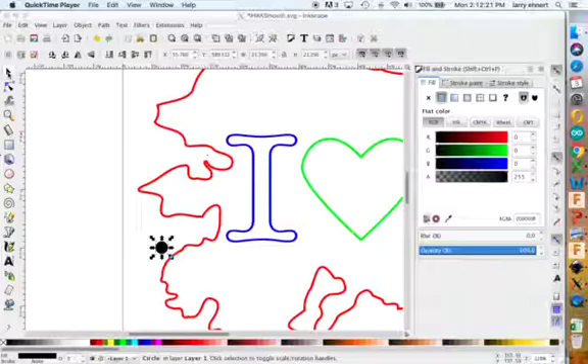So you spend a lot of time fixing your file. I've got I Heart Alaska without as many nodes as going into the laser cutter or vinyl cutter. So these have been enlarged out. I made a 6mm circle that I can drag around, see will it fit in here. It looks like it should. Just barely, but I think that'll be good enough. We'll know a little bit later.

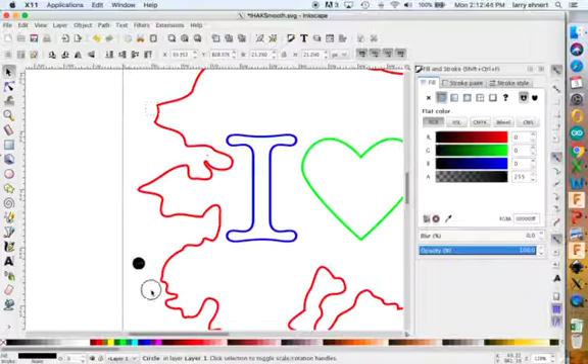Down here, it goes in. I can get some detail. Now, I'm going to lose this detail in here. I can't get into there. It's okay. I'll do the best we can. We'll come in here and we'll just recognize that that's not actually going to work, but we'll come close. So I've got my smoothed shape. I have this actually the size that I'm going to cut it. So I've made this be around 200 by 200 millimeters.

And if you import this into Fusion 360, it doesn't import exactly the right size. So we're going to make a place for it to go that is 200 by 200 and then just make sure that we're close. If you need something imported that's an exact size, you have to do a little math and figure out what the actual enlargement ratio is. And I'm still working to try to figure out what happens when you go from an SVG file into it. It's close, but it isn't perfect.

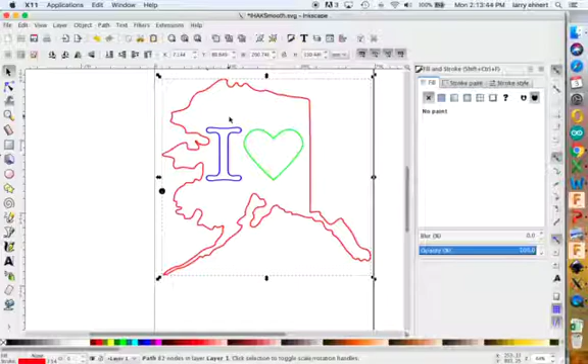You can look on the path editor and you can see the number of nodes. I've greatly reduced them doing the simplify operation, Control L, got it down, and then it took a little while going around, smoothing things out, making it look real nice. So I'm pretty happy with how this is going to be. It's what I want, and it won't be too many. If you have too many nodes, it's going to crash your Fusion 360 program. Just had a teacher come and tell me they tried to do something today and it didn't work.

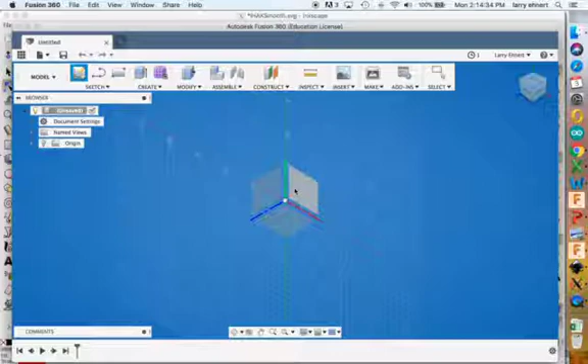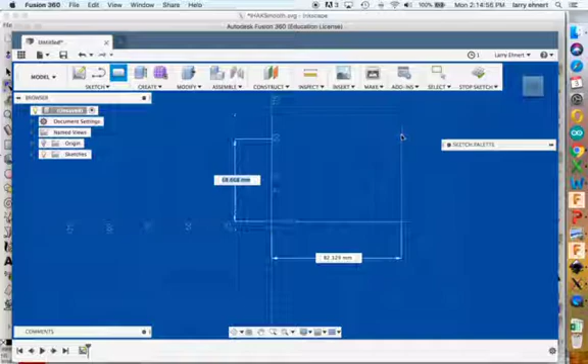So you've opened Fusion 360 and we have to create the shape in here. So we're going to make a new sketch, and again you have three places to choose. If you choose this XY plane, you'll have a lot fewer problems as far as setting up the router origin for the work coordinate system. So select this plane, green and red, and we're going to make a simple rectangle. Again, we're going to make the rectangle the size that I want to work with here. So 200 by 200 millimeters.

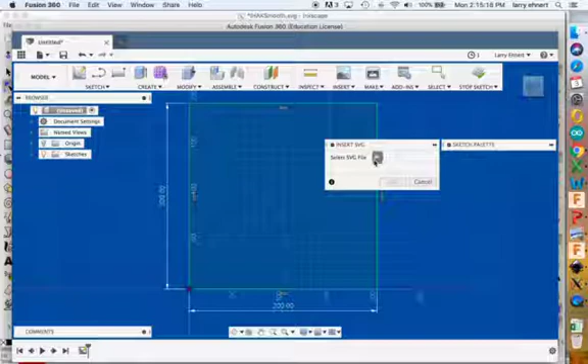If you need something bigger, you can use it. This is a good size for starting things out right now. And I will know that my imported shape will fit in there. I'll get a good feel for how big it is. I made the SVG. I have to insert the SVG. Finding the file. This is the one I made for the router, and it comes in at the 0, 0 axis, so I've got to move it around and drag it up, so it's not quite right where I want it, but it's pretty easy to move it.

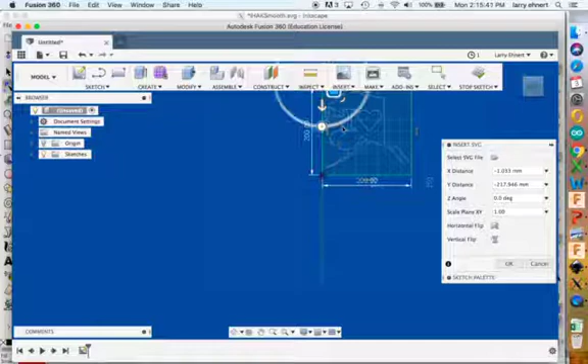So you just grab this little handle and bring it up, and if you want to resize it, there's a handle here to resize it, bigger, smaller, but I want it to be fitting the 200 by 200 square, and it looks pretty good right there. It doesn't matter where it is because the square is just for sizing reference. So I've inserted it and I'm done. That's all I have to do on the sketching.

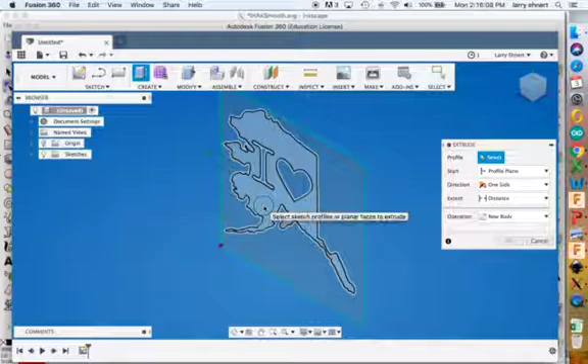I'm going to show you in the isometric what happens. I'm just going to extrude this 5 millimeters, and there's my part. That's what the wooden piece is going to look like if I want to cut out the eye and the heart. I'm not going to do the eye and the heart today, but they're there if I want to do it. So this is it. I'm done in the modeling environment.

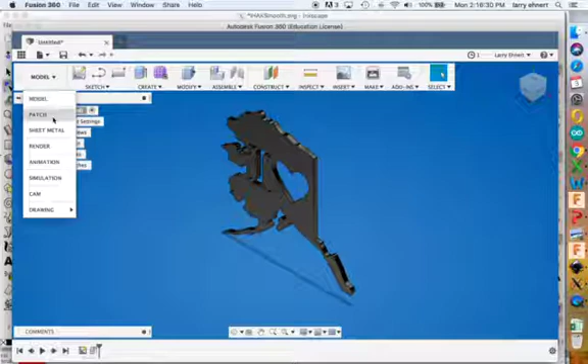Come over here and there's these other environments to work with. CAM creates the toolpaths, so it's for designing something to be built with a CNC machine. Computer aided manufacturing. So here's my CAM environment, with different choices along the menu ribbon.

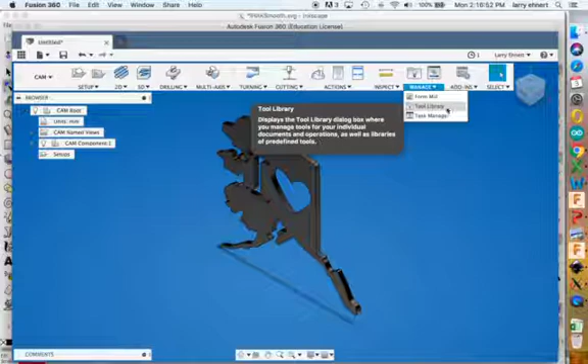First thing that you have to do one time, and that's under Manage, the Tool Library. You don't have the library, you don't have the tools that we own here at the SAS Fab Lab. They're in here. Put them in the local library, my SAS tooling. I make a copy of this. I have it on a flash drive. I've also uploaded it on the Google Drive for this course.

But right-click under Local and import the tool library. So get the flash drive, get it from the Google Drive. It's a compressed file, import that library, and you'll have all the tools and the right numbers for what we're using here. That will get updated on occasion. When I break a tool, I have to put a new one in, but this will do what we need to do for the router especially.

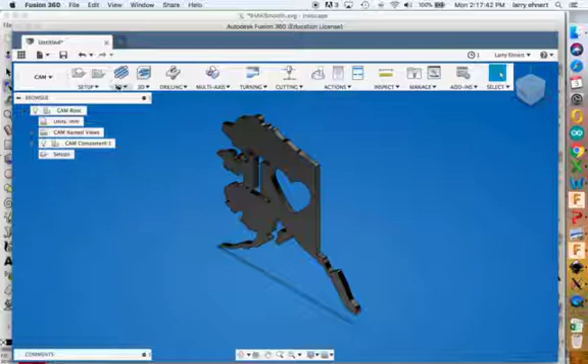We're going to be using tool number 92 here. So my tools are there. Hopefully you can put yours in. And there's two things you have to do. We have to do a setup, and then we have to create the toolpath. So setup, toolpath, and then we're going to simulate it, and then we're going to post-process it. So the first thing to do is create a new setup.

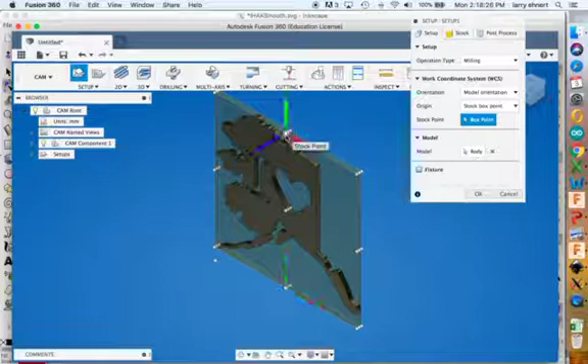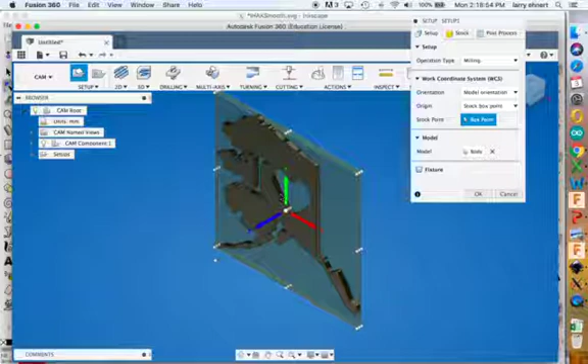Don't go onto the bottom, because if you go onto the bottom, then Z's are all positive, and I want 0, 0, 0 to be right here. I actually want 0, 0, 25.4 to be 1 inch above that, so I can check that I really am going to be 1 inch above when I think I'm 1 inch above, to keep bad things from happening, like breaking the machine. So there's the work coordinate system origin. It's a box point, and I've chosen the right one. It was there right away.

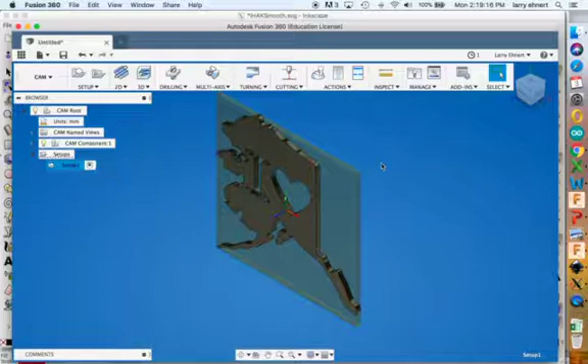The other thing you have to do is define the stock. Because I built it as just 5 millimeters, there's actually no additional stock, and so the height of the stock is 5 millimeters, and I'm okay with that. So my setup now has the coordinate system defined and how thick the stock is. The operation that we're going to do is a 2D contour. It simply goes around a path that is defined on your shape.

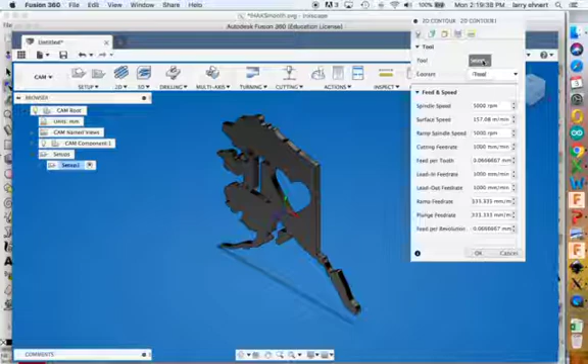So a 2D contour, there's 5 steps to go through on the tabs here. We only need to do the first 3 for the contour, and the first part is selecting the tool. You've imported the tool, it's in your SAS library, it's tool 92. There's a 6 millimeter 2-flute end mill for the router. So that is all defined, and it will work perfectly for you here.

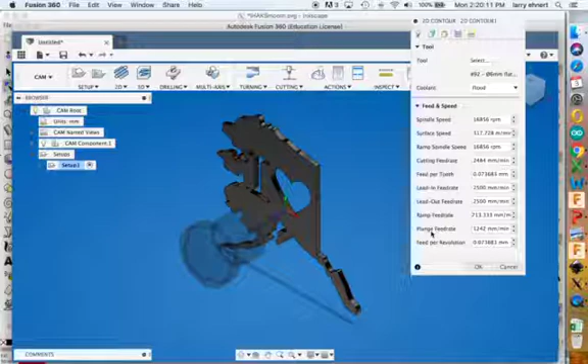The speed is set, the feed rate is set, lead in, lead out, plunging feed rate, those are all set up to work as they should for cutting 5 millimeter MDF. It's a fairly stout tool. We've broken a couple of them here, but with luck we'll be able to manage the class activity without breaking anything. Then you have to choose the geometry that you want to cut around.

If I cut around the top side, nothing will get cut unless I move it an additional offset below this. If I cut along the bottom, it's going to cut right to the bottom of the state and cut the 5 millimeter shape out.

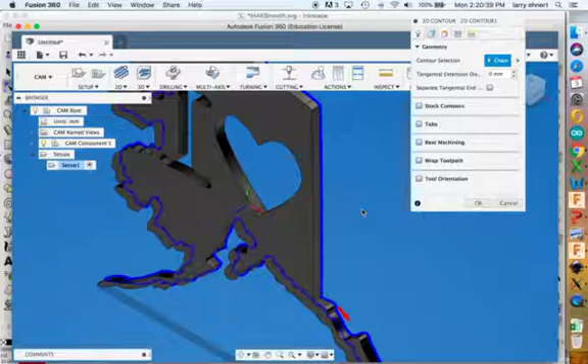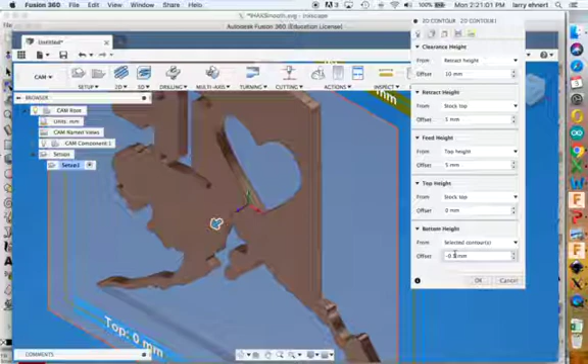And so that's the tool, the geometry contour that I want to choose. The third thing is the heights that I'm going to cut it at. The bottom of the tool, if I go just around the contour, it might not cut all the way off because it doesn't get quite all the way through it. So I go into the spoil board and below the 5 millimeter MDF by an additional 0.5 millimeters. Now I'm going to cut in the spoil board just a little bit, and we'll actually see where everybody cut because we're going to go down an additional 0.5 millimeter.

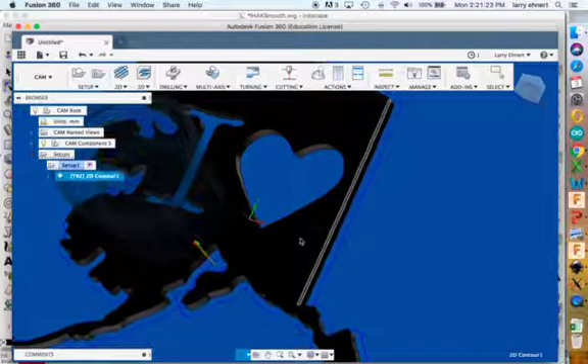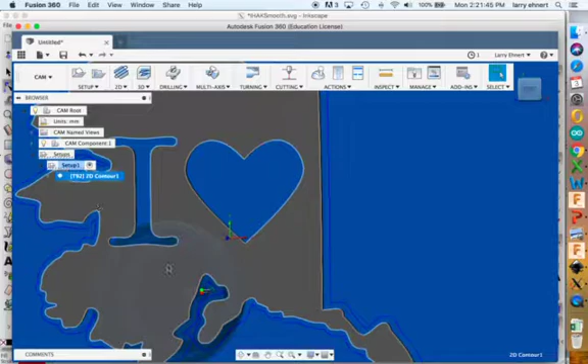Now you click OK, the toolpath is generated, and this blue line is where the center of the cutting tool goes. It's going to drop down right in the Cook Inlet, cut around here. Smart people, you're going to know how far apart this is. Well, the tool is 6 millimeters. I want to cut this edge, so the offset is an outside 3 millimeter offset. And you can see I do get in here, I don't get in here. I do get in over here and cut that out. Seward Peninsula is going to come out nice. Cook Inlet's going to come out nice. And so there's my toolpath.

To see how it actually operates, it's really a good check and almost mandatory that you do a simulation of it. You turn on the stock, that's what it thinks it's cutting. We're actually going to be cutting from a much larger piece. Run the simulation, and there's the cut, and this will be what your shape's going to look like.

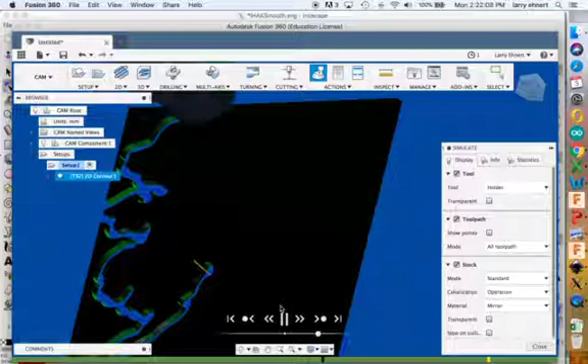And here you can decide, is there enough detail, or do I have to go back and redo a lot of the work that was done with Inkscape earlier, but looks like Alaska to me, and I'm going to be happy with this operation. I'm not cutting the I and the heart right now. We can deal with that later. It might be nice to say, hey, can you cut out just a small amount, go down 2 millimeters and cut out the heart? That would be a different operation. That would be a great summative assessment question.

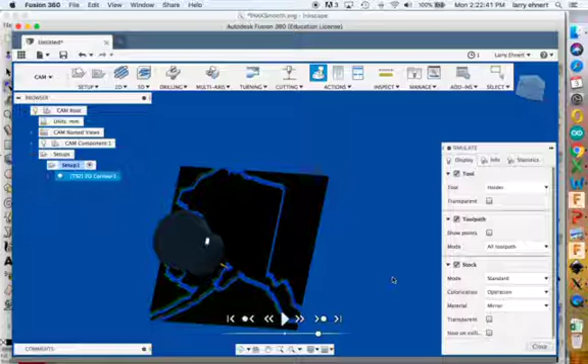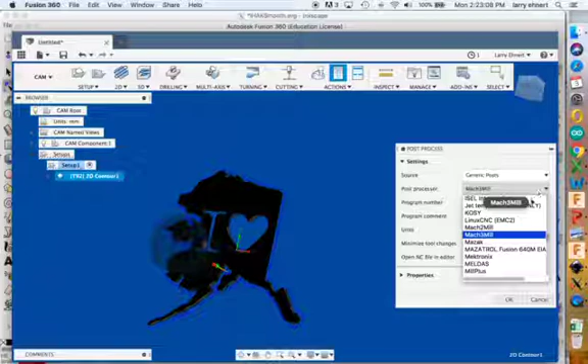So there's the simulation. I'm going to post-process it now. The post-processing is what sets up the G-code for the actual machine that we're using. This is a Mach 3 mill controller on the CNC router. So we ordered it with, there's different kinds, but Mach 3 mill is one that is easy to use. So you have to go through the list and find Mach 3 mill. When you choose it once, it should stay there. It's going to be in millimeters. It's going to open this program called Brackets when it's done.

And so I'm doing Alaska for CNC take 2 because the first one didn't record the screen.

And so now Brackets is opening up. And there's a few modifications that have to be done to this actual G-code program. First thing is up here at the top, get rid of the G49. That is something that deals with the tool offsets. And get rid of G28. The G28 command takes it back to the machine origin. You don't want to do that. The limit switches sometimes don't work.

After choosing the tool and making sure the right tool is in there, set up the safety check so that we know that we're at the beginning. So we're going to go 1 inch above, and we're going to pause with an M0 command to make sure that the tool goes to the middle of the state 1 inch above before we start cutting. At the end of the program, it cuts the last little shape, goes up to Z15. I'm going to have it go back to the origin, Y0, X0, and Z25.4.

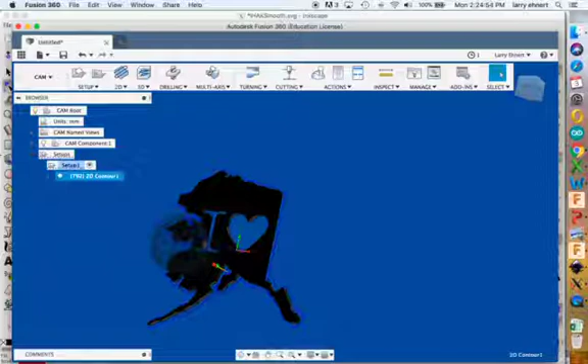M9 shuts off the coolant, get rid of the G28, and have an M5 command that makes the spindle turn off, and now we're set to save this and take it on a flash drive to the CNC router. So we'll see you over there, and with any luck, you got a good toolpath that'll cut exactly what you want.